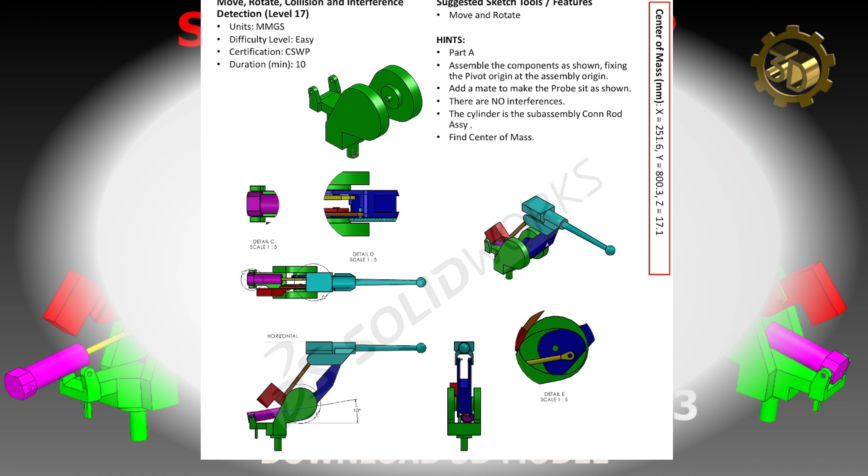Alright, let's jump in. In this task, your goal is to fully assemble the model based on the provided drawing. You're given the standard orthographic views: front, top, and side. Make sure you're using all of them to understand the correct positioning of each component.

Let's go over a few important hints to guide you. First, when you bring the pivot into the assembly, make sure to fix the pivot part at the assembly origin. This will act as your main reference and keep everything stable as you build the rest of the assembly.

Add mates to make the probe sit as shown. The key requirement here is that the probe must sit horizontally, just like shown in the drawing.

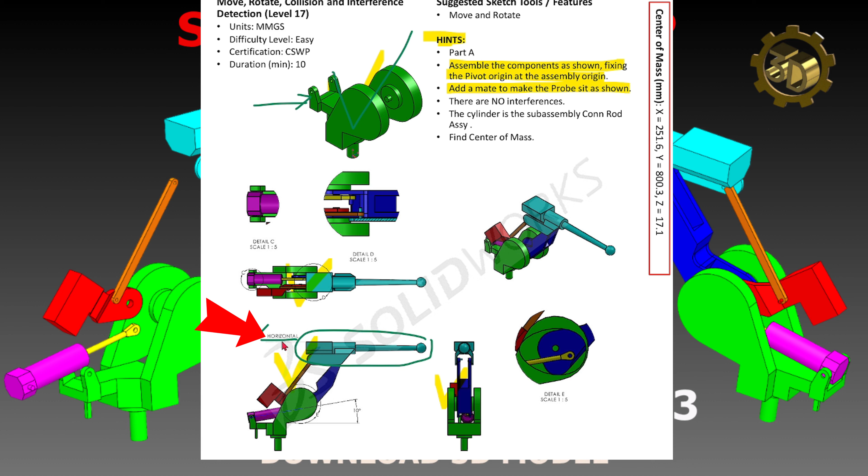Also, keep in mind that the final assembly should have no interferences, so if something doesn't look right, it's worth running an interference detection check.

Another important detail: the cylinder component is actually a subassembly, called the connecting rod assembly. Make sure it is inserted as a subassembly and not as individual parts.

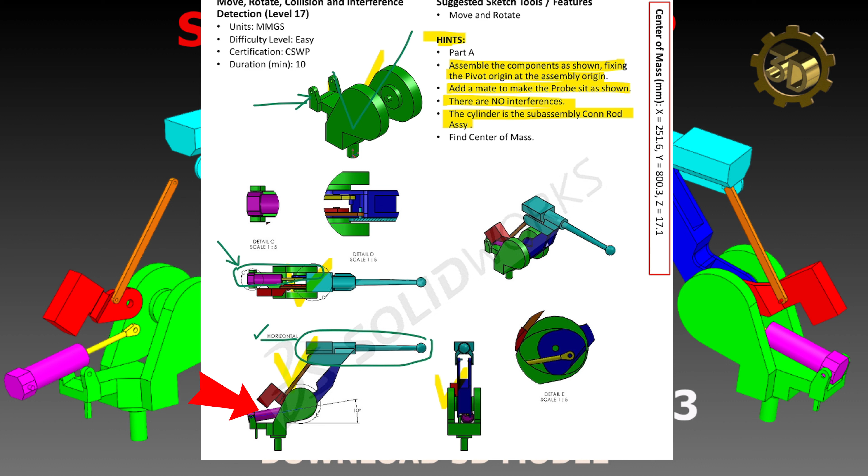Finally, after all the assembly, the assembly center of mass must be found. This is a common requirement on the CSWP exams. So in this task, we're aiming to get the following center of mass results.

X equals 251.6 millimeters, Y equals 800.3 millimeters, and Z equals 17.1 millimeters. Keep these values in mind. We'll use them later to verify that our assembly is correct.

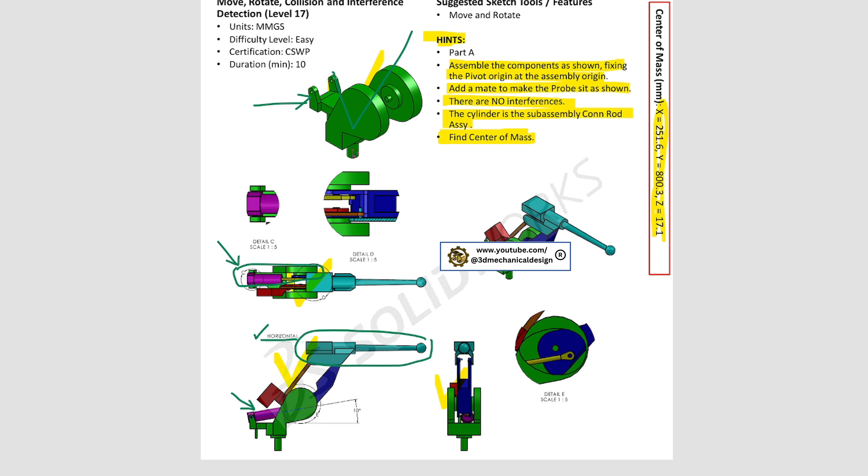Alright, let's jump into SOLIDWORKS. First thing, always good practice, check your units. Make sure you're working in mmgs, millimeter, gram, second. If that's set correctly, we're good to move on.

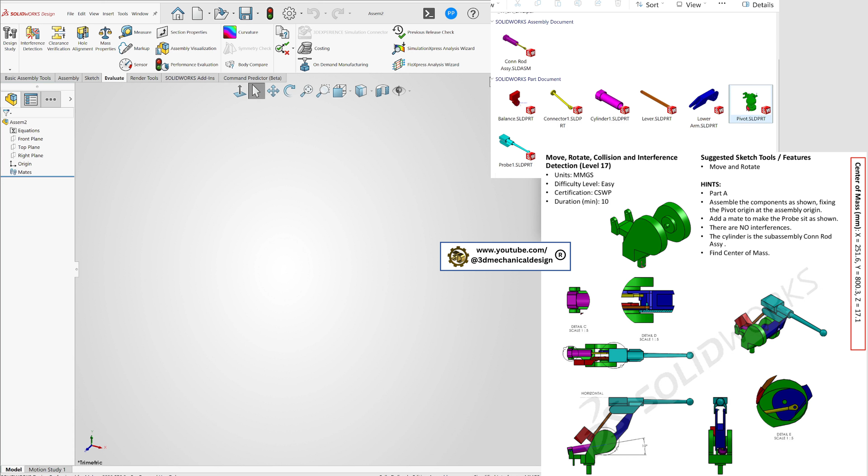In the top right corner, you'll see a folder with all the parts, and just below that, the reference drawing. We'll be using those throughout the process. Let's start with the pivot part, the green one. Let's drag it to our assembly.

Go to the Feature Manager tree on the left, right-click on the pivot, and select Float. This allows the part to move freely. Otherwise, it stays fixed in space and we won't be able to position it properly.

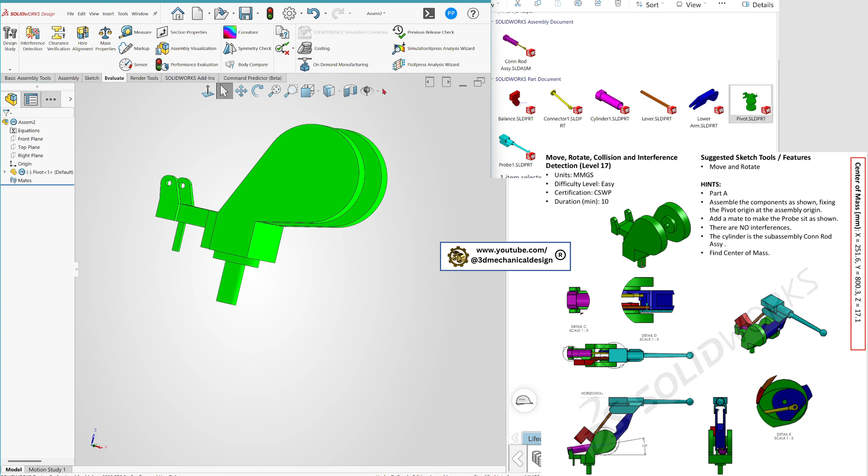Next, turn on the origin visibility so we can align everything precisely. Now, the pivot should sit roughly in this position, but the key point is to align its origin with the assembly origin. This step is critical because it defines the entire assembly structure.

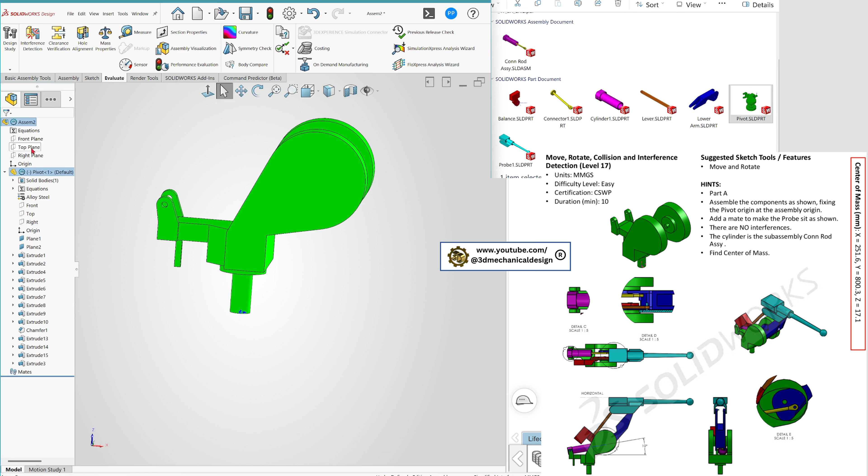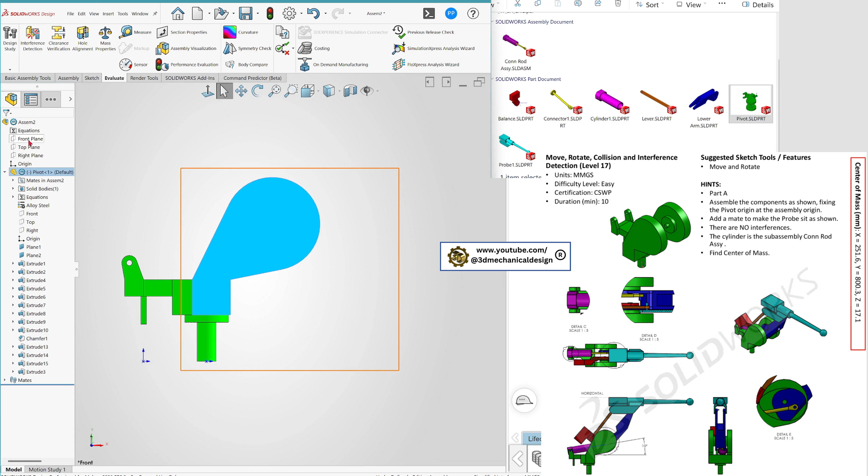Here's how to do it step by step. Mate the bottom plane of the pivot to the top plane of the assembly. Then mate the pivot origin to the front plane. And finally, mate the pivot origin to the right plane. Once that's done, your pivot origin should perfectly match the assembly origin.

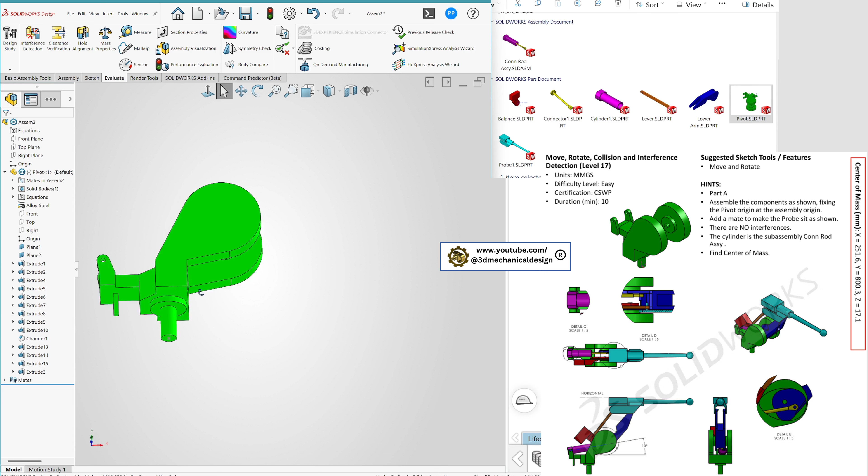Also, make sure the orientation matches the drawing. The front view in your model should correspond exactly to the front view in the drawing.

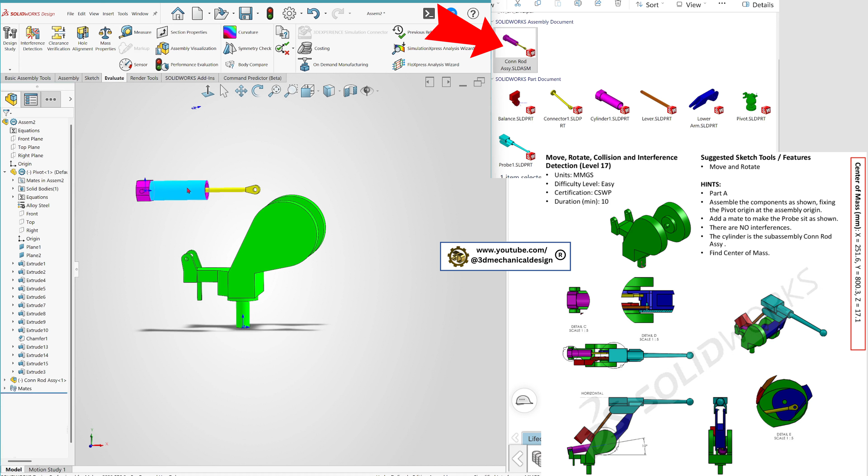Alright, moving on. Now let's bring in the Conn Rod subassembly. According to the task, we are not allowed to insert individual components like the cylinder body or piston rods separately. We must use the complete subassembly.

Alright, let's continue by adding mates and positioning the subassembly according to the drawing. First, I'll apply a width mate. Select the two side planes on the cylinder, and then the corresponding two planes on the pivot. This helps center the component perfectly between those faces. Click OK.

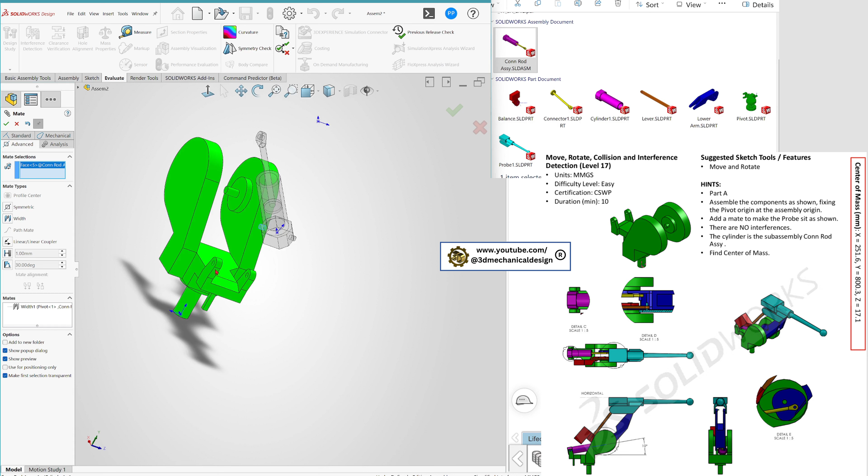Next, add a concentric mate between the cylinder's pin, and the hole in the pivot. Confirm it, and now the cylinder is properly installed.

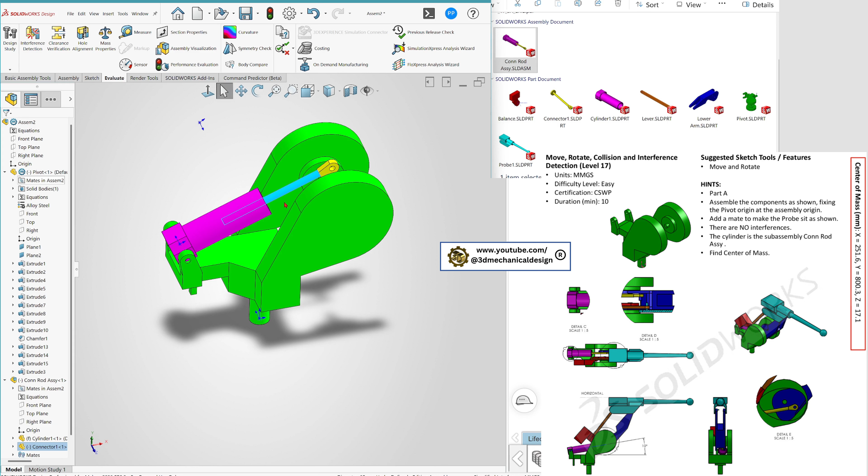Now we need to connect the piston rod to the next component. But if you try to move it, you'll notice it's not moving at all. So what's going on here? This is a common situation with subassemblies. By default, they behave as rigid bodies.

To fix that, go to the Feature Manager tree, right-click the subassembly, and select Make Subassembly Flexible. You'll notice the icon changes slightly. That means it's now flexible. And now we can freely move the piston rod as expected.

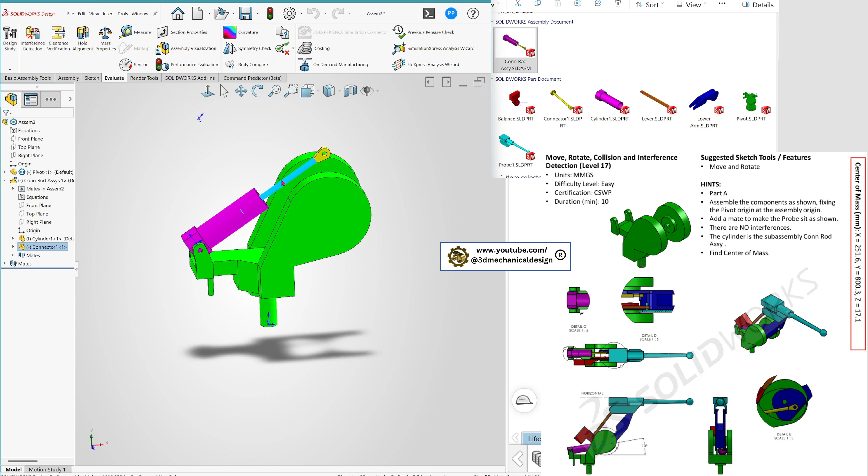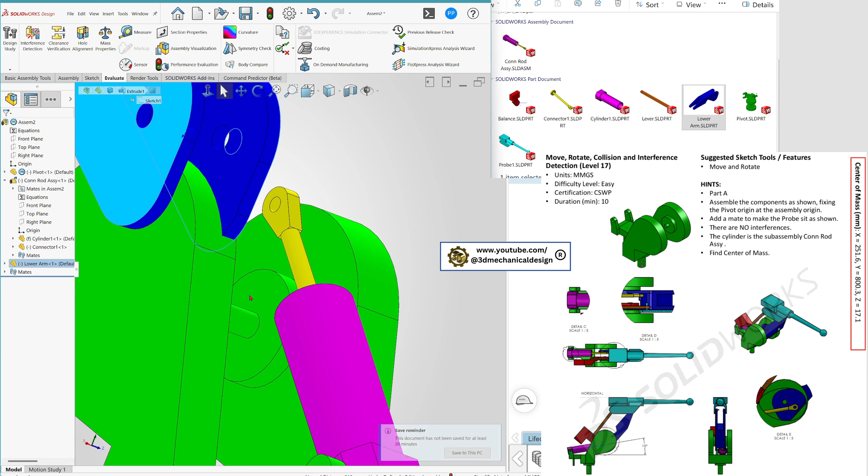Great, let's move on. Next, bring in the lower arm, the blue component. Place it into the assembly, and make sure the cutout is facing upward, just like in the drawing. Apply similar mates as before to position it correctly.

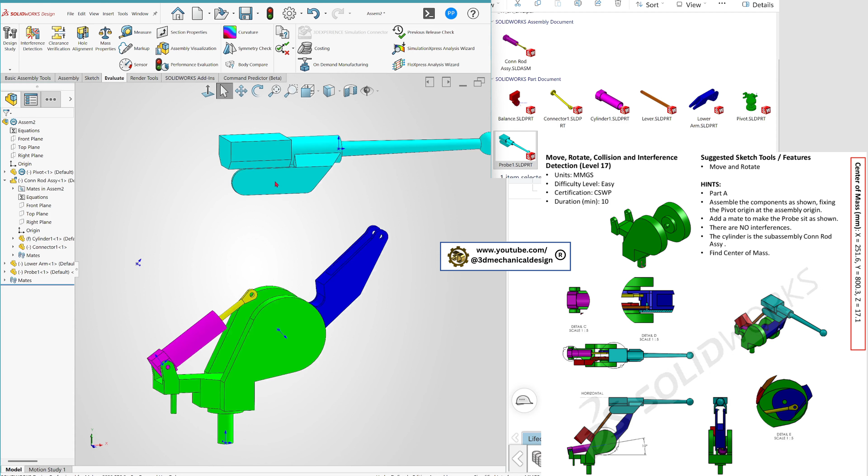Now for the probe. First, mate the probe to the lower arm, and then connect the piston rod to the lower arm as well.

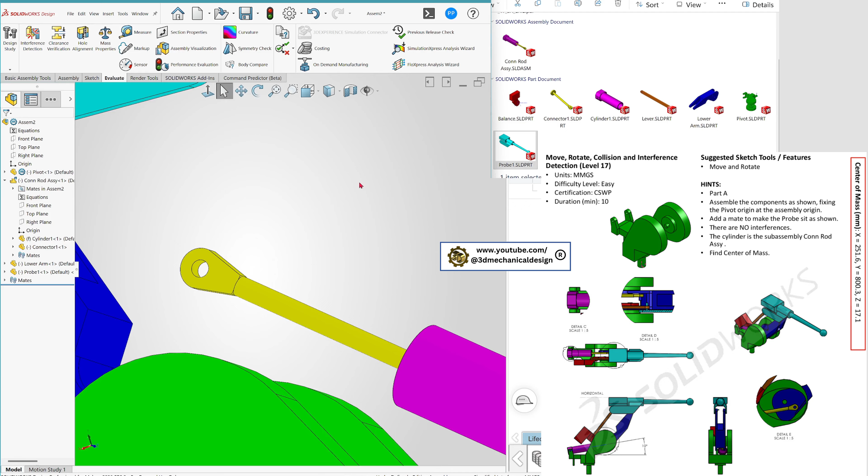At this point, the mechanism should start looking very close to what we see in the drawing. We're almost there.

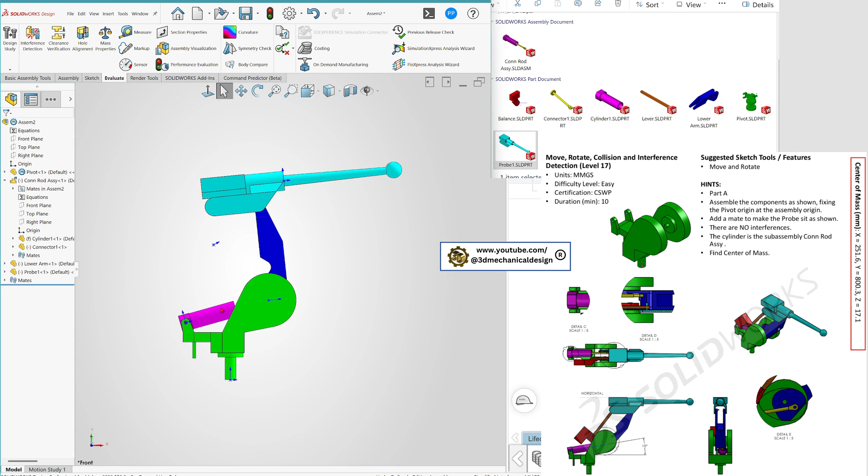Let's add the remaining components, the balance and the lever, and position them according to the drawing views.

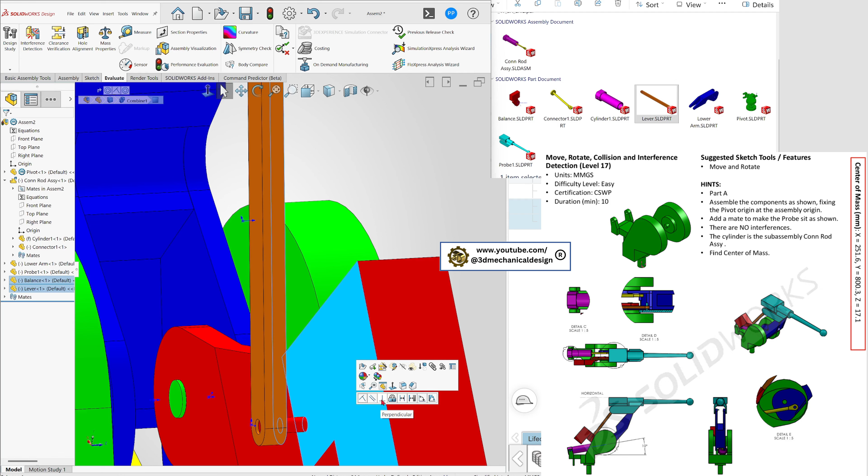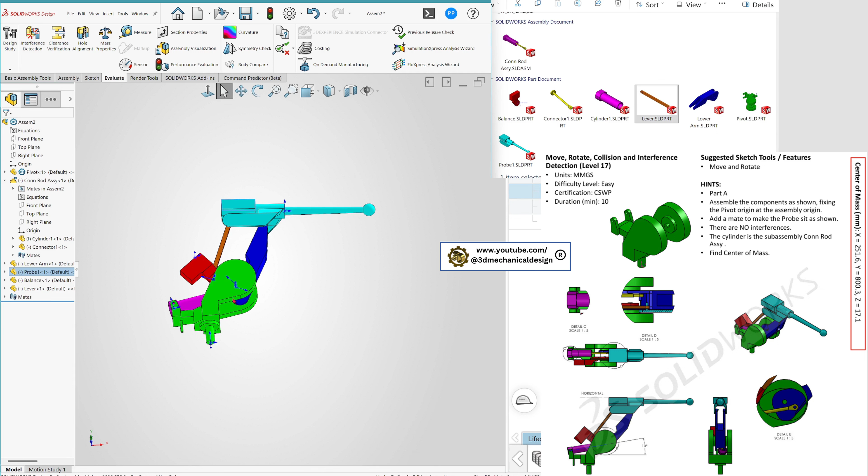Alright, now all components are in place, and visually everything matches the drawing. Next, we need to fine-tune the orientation.

First, make the probe horizontal. The easiest way to do this is by adding a parallel mate between the probe and a top plane or flat face.

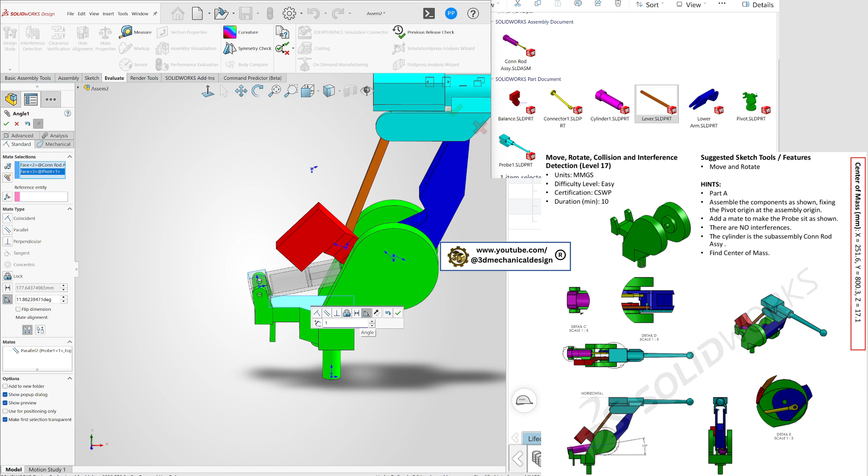Then, set the cylinder angle to 10 degrees. Use an angle mate, select the appropriate faces or planes, and enter 10 degrees.

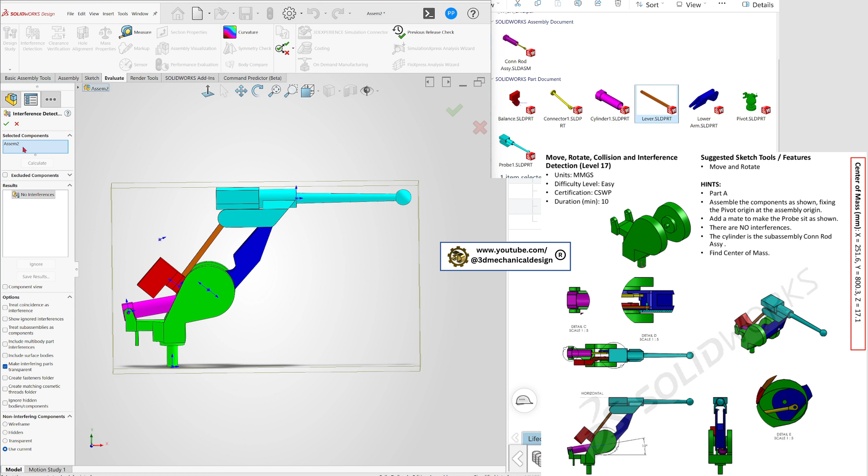Now let's validate the assembly. Interference. Go to Evaluate Interference Detection, click Calculate, and check the result. We get no interference, which is exactly what we want.

Finally, let's check the center of mass. Go to Evaluate Mass Properties. In my case, I'm getting approximately x equals 251, y equals 800, z equals 17. So we're very close to the target values.

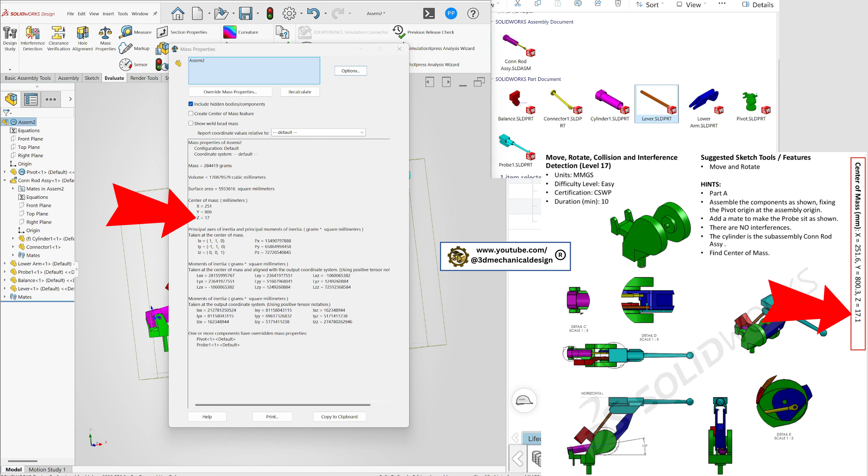The difference in the y direction is less than 1%, which usually means one of the mates might be slightly off or flipped. Take a moment to review your mates, especially angle and alignment conditions, and see if you can get even closer to the expected result. That said, the overall setup and workflow are correct, and this is exactly the kind of approach you need.